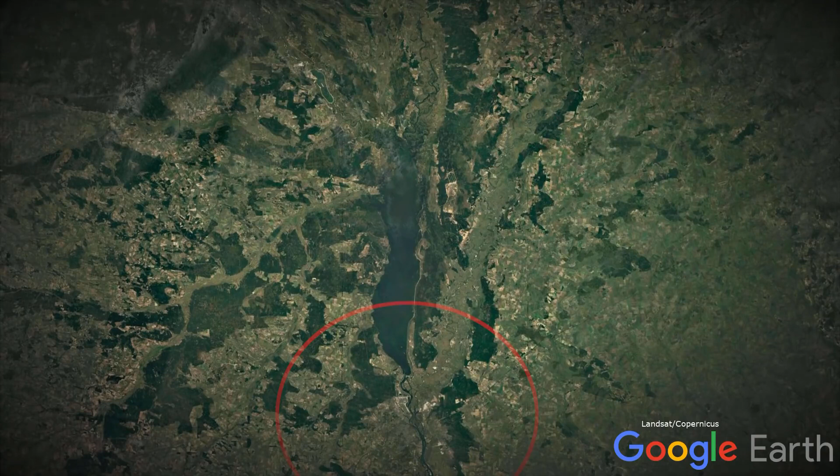Our story starts back in 1970 in Ukraine, about 100 kilometres, 62 miles, from Kiev, when ground was broken for a new city that would become known as Pripyat, an Atomgrad that was designed to house the workers for a new nuclear plant. It should be said that the original plans were to build the city and the plant just 25 kilometres or 16 miles from Kiev, but it was thought to be too close to a major city, which turned out to be a good decision.

The concept of an Atomgrad is similar to, say, Tomsk, which were closed cities, although Pripyat was open later on in its short lifetime as a city. These municipalities were designed to be self-contained communities that had a sole purpose, and that was keeping the power plant working and, by extension, the workers that were employed there happy. The community at Pripyat was developed to be the perfect home for a young family, with its amusement park and modern, at the time, architecture.

In the same year, the ground where the new plant would exist was prepared for construction. The Chernobyl nuclear power plant began construction proper in 1972 after the central government decided on what type of reactors the site would house. Originally, a pressurised water reactor was thought to suit the new plant, but it was overruled by Anatoly Alexandrov, the chief scientist who was at the time supervisor of the project of RBMK reactor plants. The reactor type was preferred due to the design being cheaper to produce, and as we found out with Leningrad, that cost was a pretty high priority, some might say even over safety.

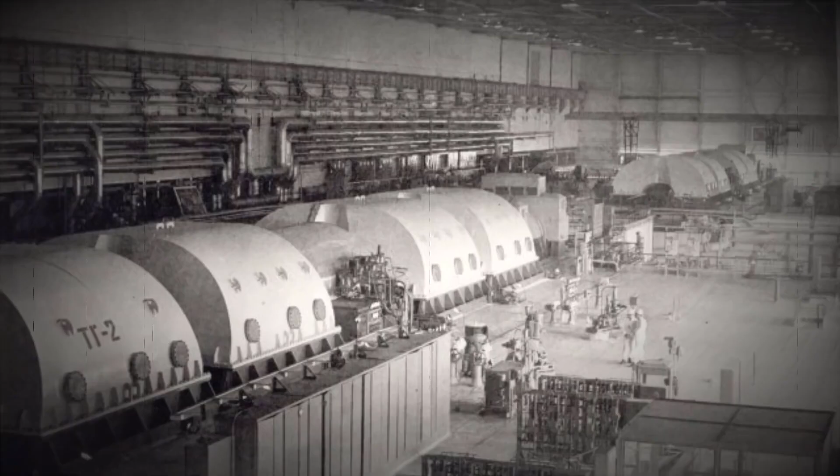The nuclear power plant had the first of its 4 reactors ready to operate in 1977, followed by number 2 in 1978. As a quick side note, Units 1 and 2 were the first generation RBMK 1000 reactors, and because of this they had slightly different core loadings and containment structures. But the remaining 2 reactors at Chernobyl were of a slightly more modern second generation, named Units 3 and 4, which went online in 1981 and 1983 respectively. There were plans for another 2 units, but these were abandoned after 1988 when risks of contamination left the project untenable.

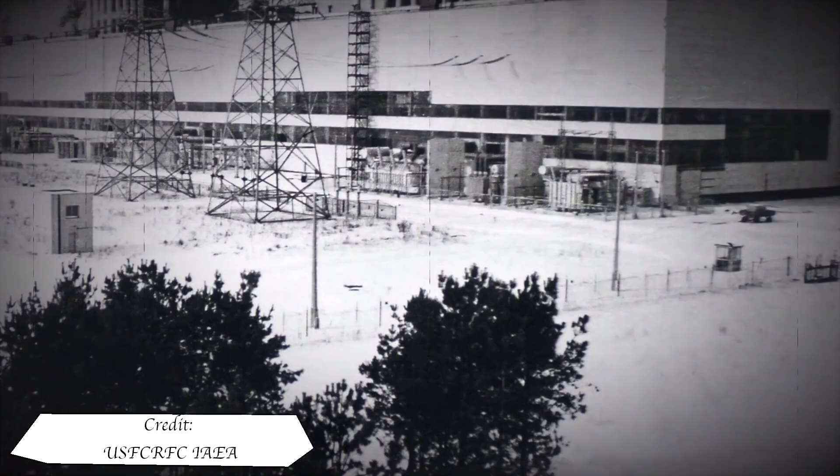The nameplate capacity of Chernobyl nuclear power plant was Unit 1 at 1000 megawatts of electricity, Unit 2 at 1000 megawatts of electricity, Unit 3 also had 1000 megawatts of electricity, and the same with Unit 4. In this video, I'll be focusing on the second generation RBMK, its design, and more specifically Unit 4. But I did look into the first generation in the Leningrad video.

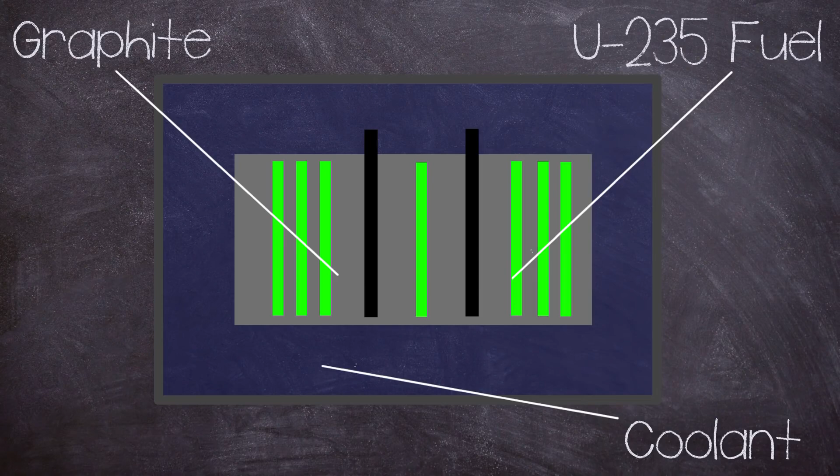The RBMK was a bit of a unique design in the reactor world, but it was a product of evolution rather than revolution, in that it used graphite to moderate the chain reaction with light water as a coolant. This combination allowed it to use lower enrichment uranium-235 for fuel, which is not surprisingly significantly cheaper than other reactor designs. The RBMK had a very large core region with a height of 7 metres and a diameter of 11.8 metres, which was mounted in a steel cylinder placed on top of a biological shield.

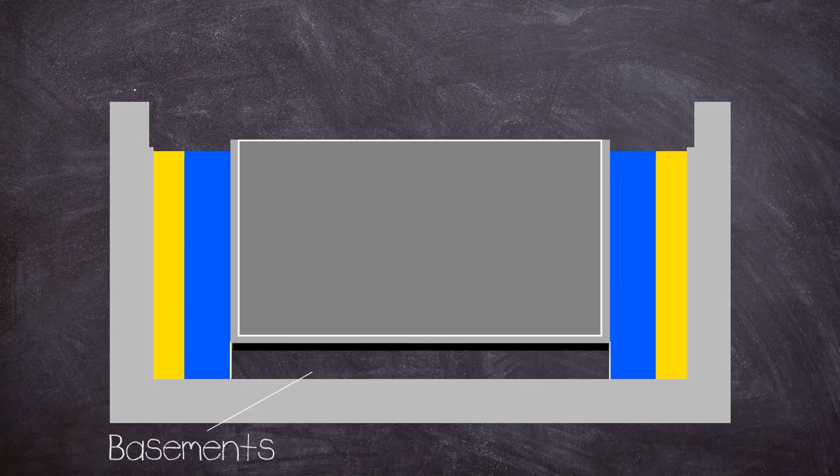The steel cylinder was 16mm thick and had a diameter of 14.52 metres by a height of 9.75 metres, dug into the floor of the reactor building, inside a reinforced concrete lined pit. Between the steel wall and the concrete lining, a water tank was placed, followed by a sand packing. Below the bottom biological shield, there were several basements used for pipework for the reactor core cooling loops. The core consisted of graphite blocks sized 25 by 25 centimetres, stacked up with holes drilled through the centre for fuel and control channels.

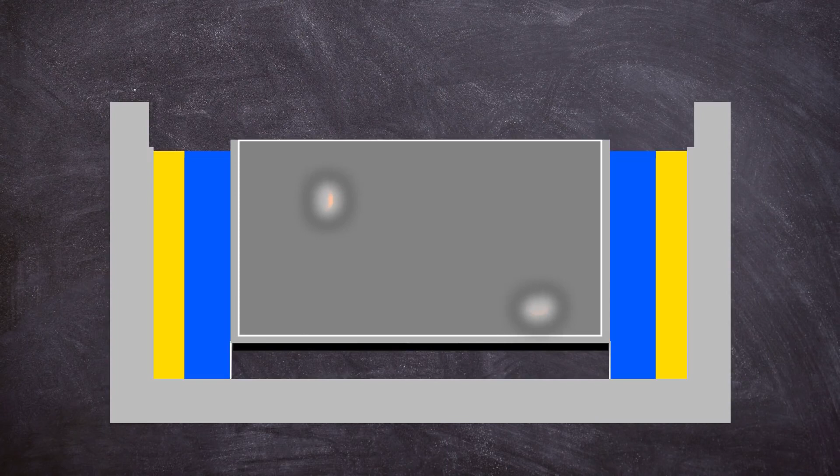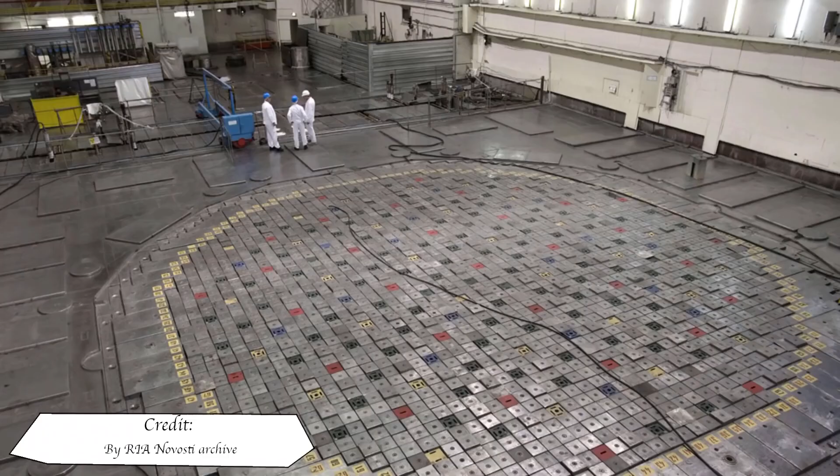The size of the core could cause issues in reactivity control during operation, but we will talk about that a bit later on. On top of the core, another biological shield was placed with a steel cover on top of it, which formed the floor of the reactor hall. The cover plate was capable of withstanding a pressure build-up resulting from steam released by two simultaneous channel ruptures. All of this allowed the design to be refueled whilst in operation, which again helped with costs by reducing downtime.

As a side effect of this, the confinement structure of RBMK reactors is less than ideal, as the tall refueling machine had to be housed inside the reactor hall. Because of the large floor space and subsequent roof requirements, the vast quantities of heavy concrete wouldn't have been architecturally, or more importantly, financially viable.

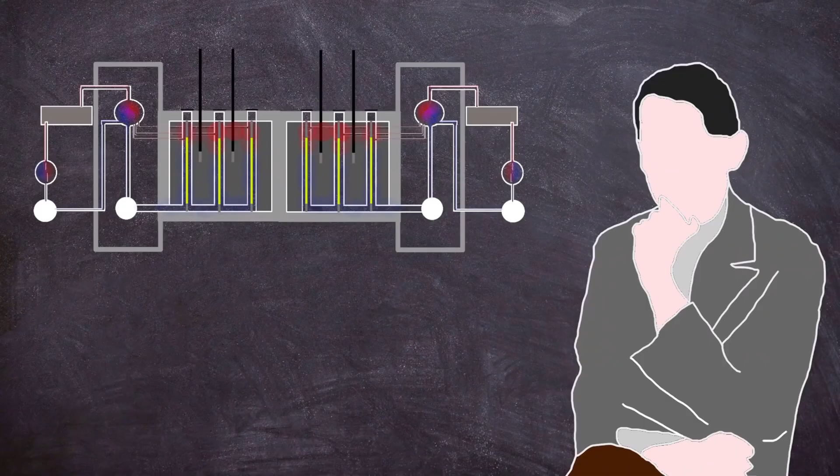The RBMK didn't have a prototype and was instead put straight into production, with the first reactor being installed in Leningrad in 1970. The original designs omitted containment, instead claiming that the fuel being in its own channel with flowing cooling water was an acceptable alternative. The main takeaway from this is containment was poor, resulting in disastrous results in the case of fission product release.

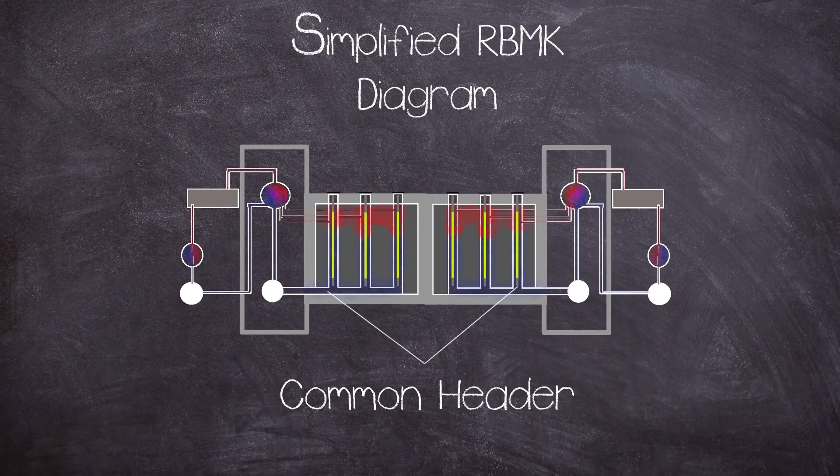The coolant was pumped through the core, from the bottom common header through high pressure tubes that jacketed the fuel elements, where the water would boil. Coolant water also circulated in the control rod channels. The primary cooling of the reactor was via two separate cooling circuits, one for each half of the core, meaning everything was doubled up, leading to four main circulating pumps, which were three operating and one standby per loop.

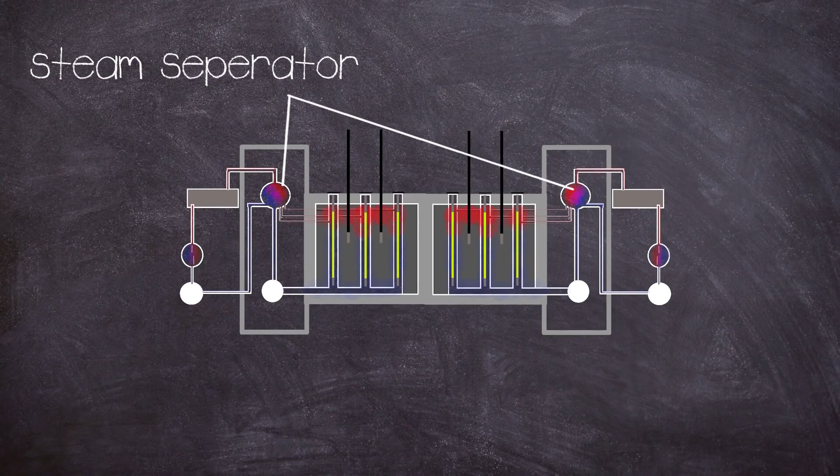As the coolant boils, it exits the top of the core and is passed through a water steam separator, which takes the steam to high then low pressure turbines which generate the electricity. The steam is then passed through a condenser that turns it back into water to be pumped back into the core, completing the primary cooling circuit. The condenser is cooled by using a separate secondary water cooling circuit, meaning the primary cooling circuit is self-contained.

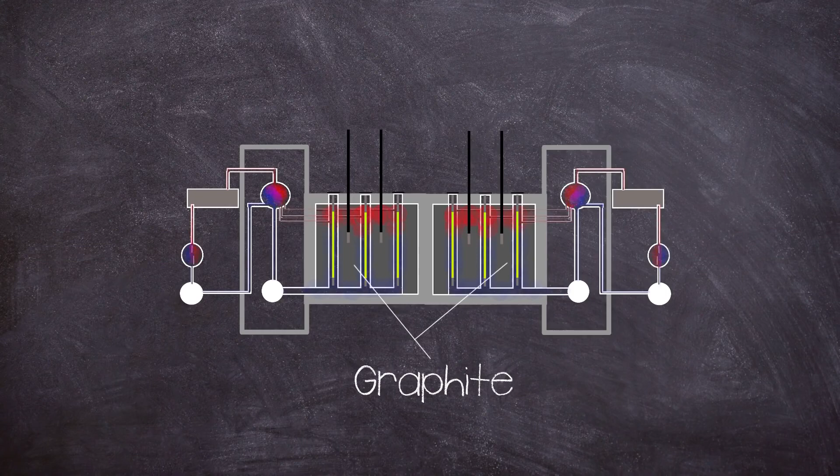As mentioned before, the reactor employed graphite blocks for its moderator. Now, a moderator is used to reduce the speed of fast neutrons released from fission, so they can better facilitate a chain reaction, getting more use out of the fuel. Ideally, moderators work without capturing any neutrons, leaving them as thermal neutrons. But where the design has its potential flaw is having a separate coolant that can also absorb neutrons, which can make the reactor unstable in certain situations.

This brings up the big elephant in the room, and that is void coefficient. You see, it wasn't just the graphite that had moderation characteristics, but the coolant water as well, because H2O naturally slows down and absorbs neutrons. This brings a problem for the reactor, as with the increase in temperature from fission, the coolant boils off into steam, known as voids, i.e. a bubble that does not absorb neutrons. With the steam not absorbing neutrons, this leads to an increase in the power of the reactor.

The RBMK did not rely solely on its coolant for moderation, because that's what the graphite was for, but the water did absorb neutrons, meaning that as it boiled off, the operators had to compensate for this with the control system. If not properly managed, a runaway can happen as the coolant heats up, increasing reactivity, heating up the coolant more, creating more steam, leading to greater reactivity, and this is called a feedback loop. During this reactor state, more and more neutrons are produced and their density grows exponentially fast, creating a positive void coefficient. The risks of a feedback loop were greater at certain power levels, but this will be covered later on.

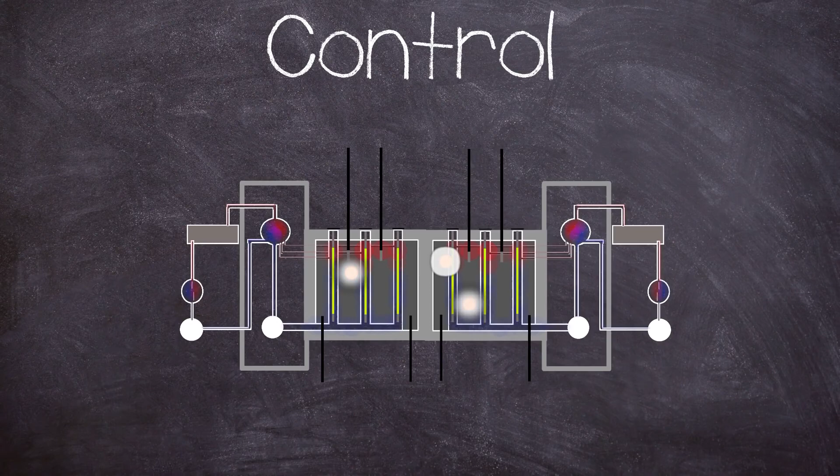Now this leads us quite neatly onto reactor control. As I said before, the core region was rather big, and this meant that the RBMK was kind of like multiple smaller reactors in that hotspots could occur which needed to be individually managed. And this leads on to the strange design choice for both top-loaded and bottom-loaded control rods.

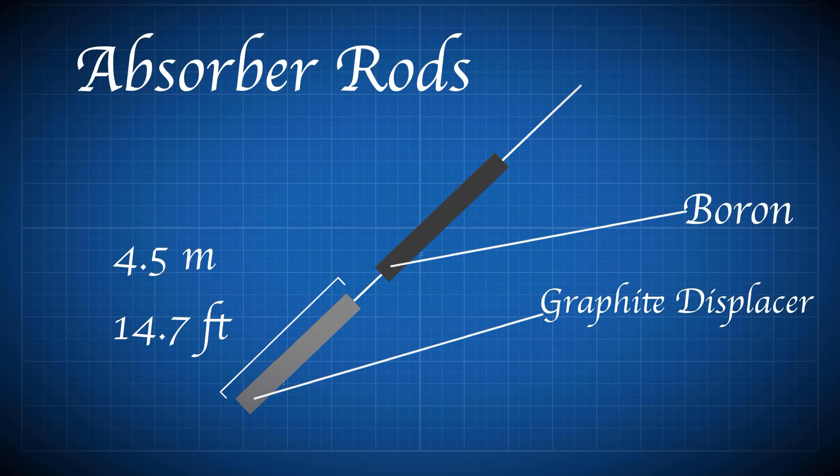There were 167 top-loaded rods and 32 shortened rods loaded via the bottom, and another 12 automatic controls inserted from the top. The shortened rods were used to manage axial power distribution, which was necessary due to the core size to manage hotspots. The main control rods had a 4.5 metre long graphite rod termed a displacer attached to the end of the length of the control rods, except for the 12 rods that were used in automatic control.

The displacer connected to its rod via a telescope, with a water-filled space of 1.25 metres separating the displacer and absorbing rod. This was to stop water filling the space left behind by the control rod after it has left the core region, which would parasitically absorb neutrons. Because removing one neutron absorber in the form of a boron control rod to be replaced by another neutron absorber, albeit weaker, in the form of H2O, kind of defeats the point of a control rod.

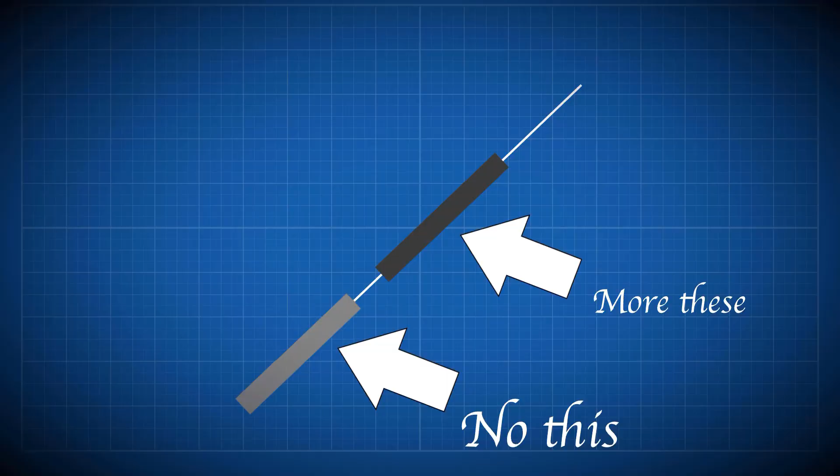Thus, if there was no displacer, then more control rods would be needed, as each one would have less of an effect on the reactivity of the core. The dimensions of the rod and displacer were that, when the control rod was fully extracted, the displacer sat centrally within the fueled region of the core, with 1.25 metres of water at either end. But this setup in certain situations could cause a positive scram effect.

On receipt of a scram signal causing a fully withdrawn rod to fall, water was displaced from the lower part of the channel as the rod moved downwards. This caused a localised insertion of positive reactivity in the lower part of the core. This was because the RBMK had a high moderator to fuel ratio, meaning the lower part of the core would experience a spike in reactivity as the graphite displacer entered it, as it replaced the neutron absorbing water with a neutron moderating graphite.

But this situation was only dangerous at certain power levels of the reactor, which was meant to be mitigated by the knowledge and training of the operators, and also importantly by their management. Part of this mitigation was by having an operating reactivity margin. The ORM is the number of equivalent control rods of nominal worth remaining in the core.

The total time required for a scram or insertion of the emergency control rods into the core when starting from the upper limit stop switches was around 18 seconds, which was relatively slow, but this was due to the size of the control rod channels and the fact that the coolant had to be pushed out of the way. The scram could be initiated by the control system or manually via the AZ5 button.

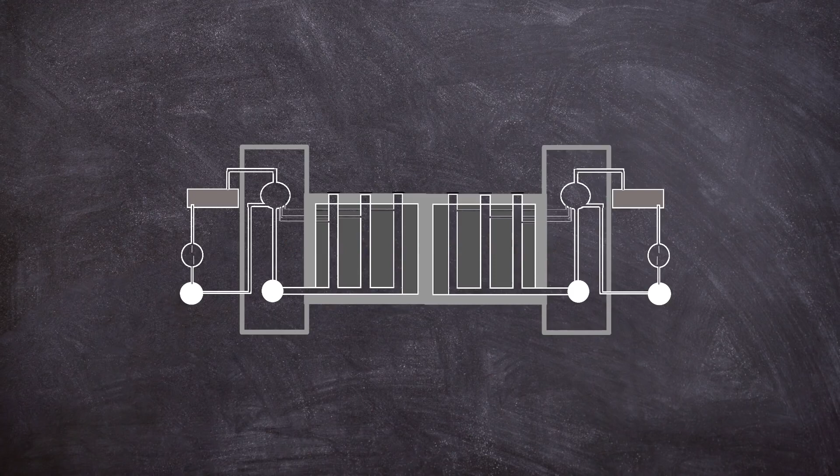This meant that low power operation below 10% had to be done by the operators relying on experience and feel rather than monitoring the equipment. But manual low power control was only really intended for a cold startup, so to speak, when the reactor was free of the neutron absorbing poison Xenon-135. Right, I need to mention neutron poison, as it will play a vital part later on, and was also a contributory factor in another RBMK incident, the meltdown in Leningrad in 1975.

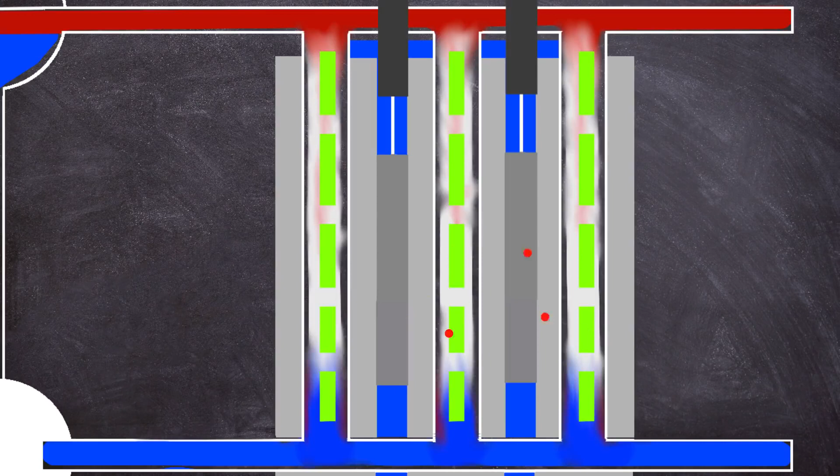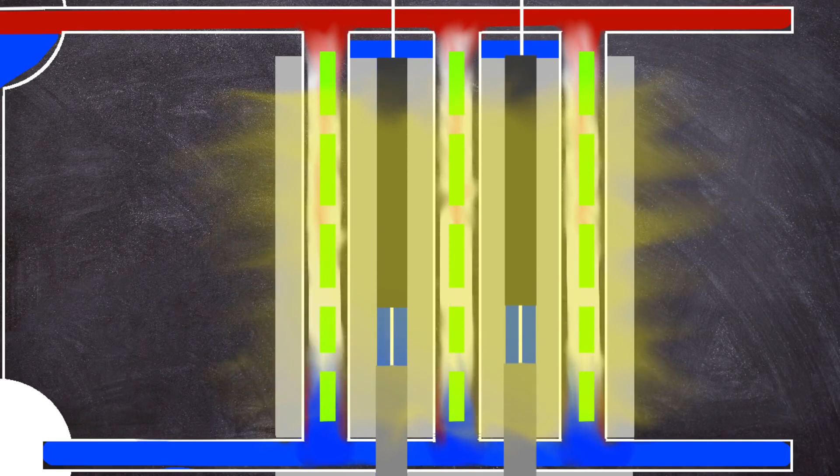During fission, some products are given off, one of which is Xenon-135, which has a high neutron absorption rate, which is okay when the reactor is in a steady state, as it burns off this undesired byproduct, as poison burning is proportional to reactor power. But when the power of the reactor is decreased, the Xenon-135 is not burned off, and can shut down the chain reaction by absorbing too many neutrons. This is known as an iodine pit.

All is not lost, as Xenon-135 has a relatively short half-life of around 9.2 hours, so a reactor core is considered poison-free after several half-lives have passed. But this is not good from an economic standpoint, as the unit would be shut down for a few days, which is where good management is meant to come into effect, where safety is prioritised over money, but in the former USSR, taking a reactor out of action for a few days could have a detrimental effect on one's career longevity.

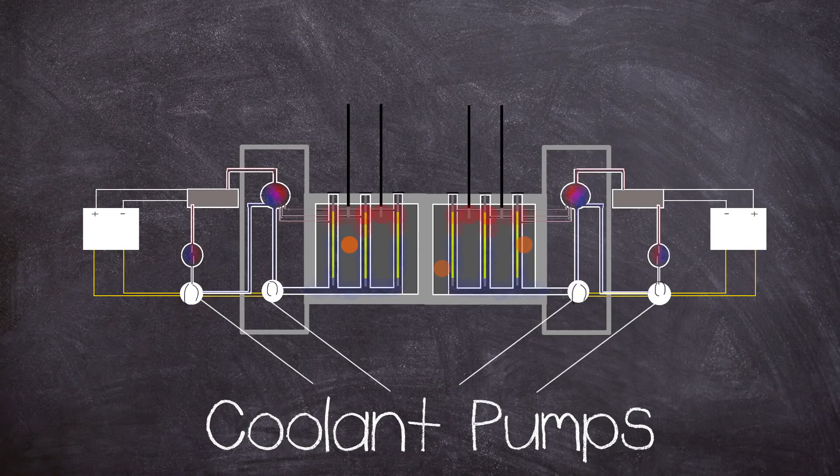Our story starts with an issue inherent to all reactors of any type, a thing called decay heat. You see, reactors produce heat from fission, which is used to create steam to drive the turbines for electrical power. Some of this power is taken to drive the electrically operated coolant pumps, which keep the coolant flowing through the core. The reactor needs around 28,000 cubic metres per hour during full power operation. Some heat is produced not directly from fission, but instead from the products produced from the chain reaction, and this is known as decay heat.

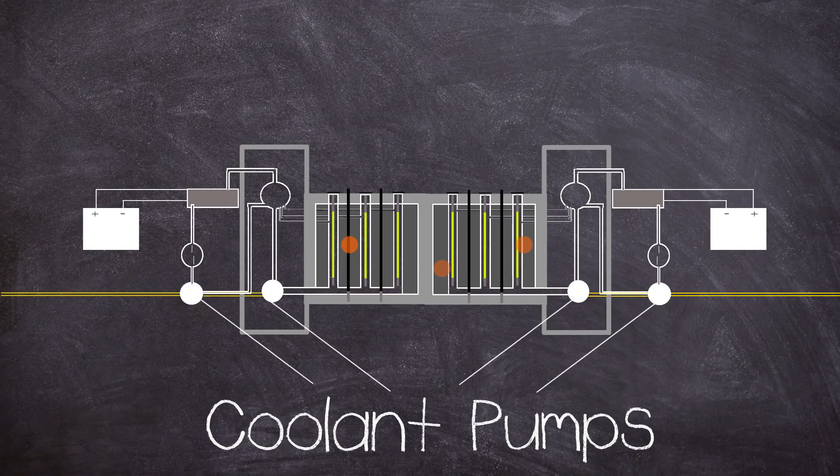And when the reaction stops, this continues, at least for a while after shutdown. During power operation, this is fine as electricity is being produced, but after shutdown, the pumps need to keep circulating to remove the decay heat. Usually the electricity needed for the pumps can be drawn from the national grid. But what about if there is a full power outage? Then backup is needed. This presents a problem.

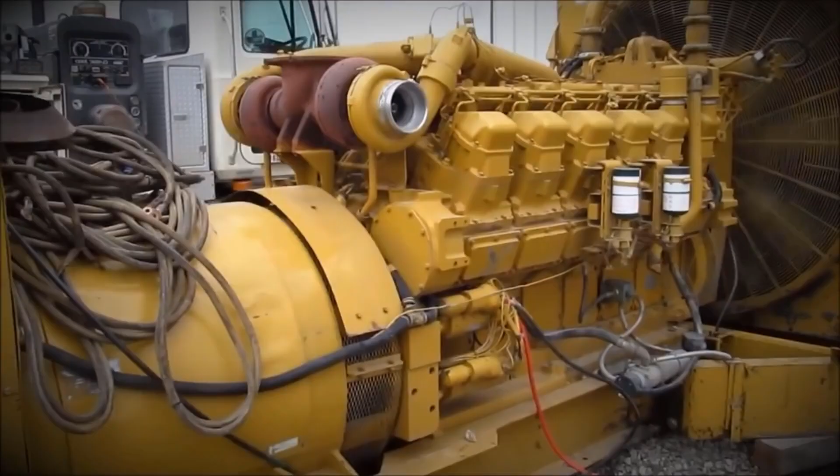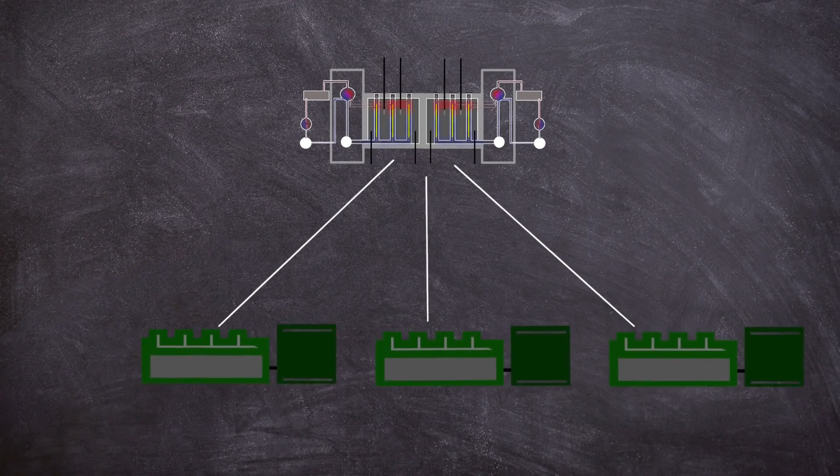If for any reason, being scheduled or not, a reactor is shut down and there is a power cut, how will the pumps keep working? Well, the solution is pretty simple, and that is a diesel backup generator. Each of Chernobyl's reactors had 3 backup diesel generators, which took in excess of 70 seconds to reach full power. Too much time in the event of a full power cut.

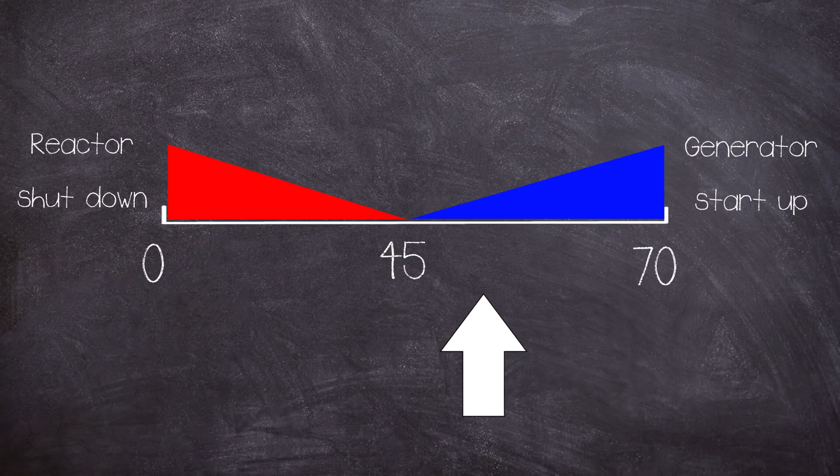In theory, some of this time could be covered by the spool down of the turbo generators, which was theorised to cover around 45 seconds. Not the full time needed, but possibly enough to prevent fuel melting. To prove that this could work, it had to be tested out, and in 1982, 1984 and 1985 this was attempted, but all tests failed to produce the electricity needed to run the pumps. The test was to be conducted again in April 1986.

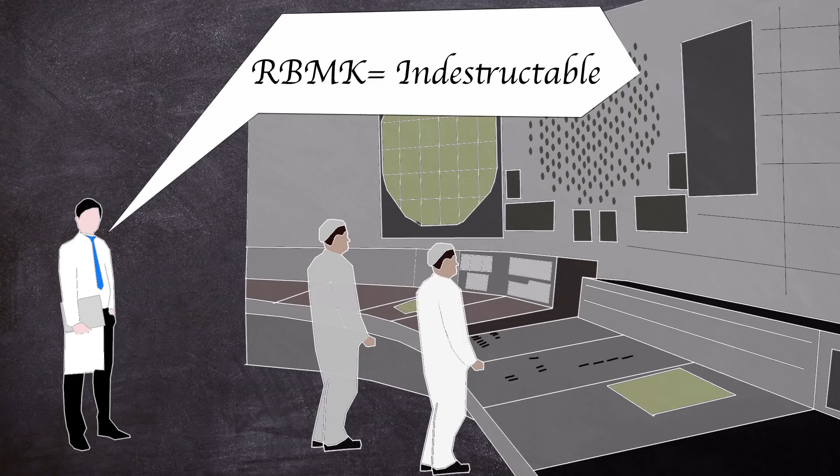Strangely, the test procedure that was written hadn't taken into account the eccentricities of the RBMK reactor, especially at low power outputs. The test was to be conducted during a routine shutdown. For the test to go ahead, some vital systems had to be switched off, most notably the active-passive emergency cooling system used in a loss of cooling accident. This required the chief engineer to sign it off.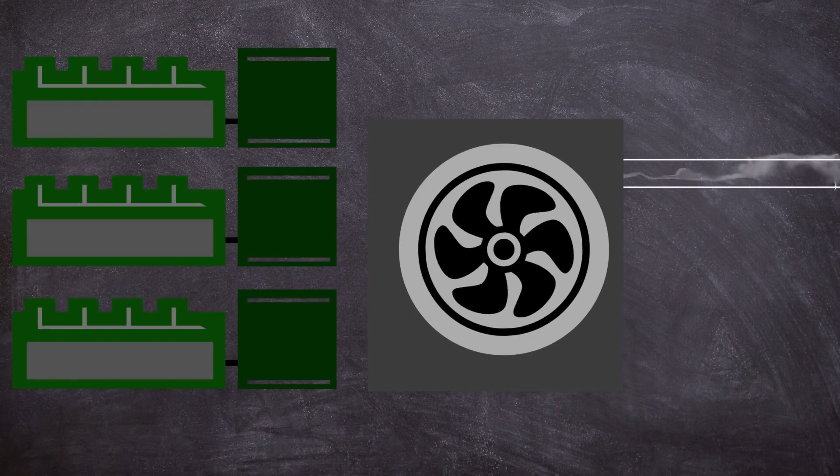In preparation for the test, the following had to be set up. The reactor power was to be reduced to between 700 and 1000 megawatts of thermal energy, and the steam turbine generator was to be at normal operating speed. After all this was sorted, the preparations for the electrical test could go ahead. The steam supply to the turbine generator would be closed off. The turbine generator performance would then be monitored to see if it could bridge the power for coolant pumps until the emergency diesel generators took over.

When the emergency generators supply electrical power, the turbine generator will be allowed to continue freewheeling down. The normal planned shutdown procedure of the reactor was then to be completed. The date of the test was to be the 25th of April 1986, 2:15 p.m., completed by the day shift. As such, the operators were briefed on the procedure and a team of electrical engineers was present.

At around 1 a.m. on the 25th of April, the reactor was gradually powered down to around 50% in time for the day shift. At 1:05 p.m., the turbo generator TG7 was switched off. The 4 main circulating pumps, 2 electrical feed water pumps and other electrical equipment that was connected with this turbo generator were switched over to bus bars for the turbo generator TG8.

The ECCS was disabled with the correct authorization from the chief engineer, but just after 2 p.m., the Kiev electrical controller asked for the test to be postponed to cover the evening electrical peak demand. The request was due to another power station in the region unexpectedly going offline. Chernobyl's director agreed and the test was pushed back, but the ECCS was not reinstated. The status of the ECCS showed the lack of safety culture at the plant. Although the system wouldn't really be a factor in a disaster, it highlights the management culture at the time.

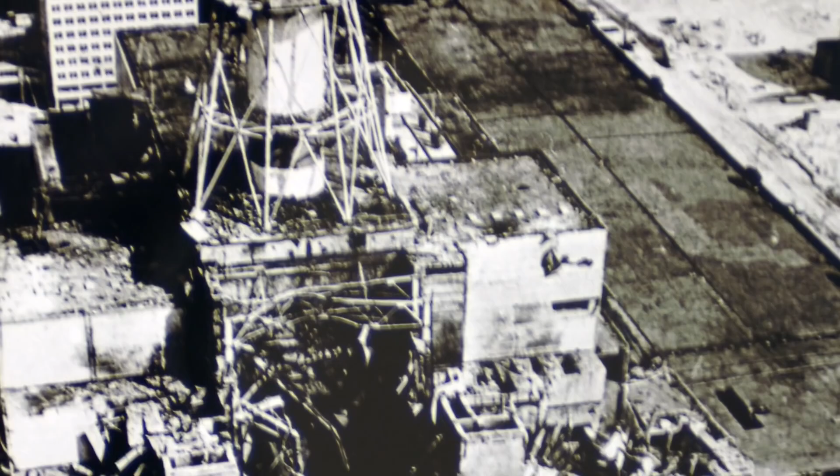Some of the debris that was ejected started a fire on the roof of Reactor 3's building, but insanely the unit wasn't shut down straight away. Instead, the operators were told to take iodine tablets and don respirators. At 1:45 in the morning, the first responders from the Chernobyl fire team arrived under the command of Lieutenant Vladimir Pravik and began trying to extinguish the flames on Unit 3's roof. All around them lay pieces of Unit 4's graphite core. The firefighters were only aware of the fire, and because of this they didn't have any radiological protective clothing on. As they worked, they breathed in some of the fission material in the form of dust and were exposed to the deadly radiation.

Many would come down with acute radiation sickness shortly after. Some of the first responders felt a metallic taste in their mouths, similar to what others had reported post-exposure, for example from the victim of the Wood River Junction criticality.

The fires on the roofs of Units 3 and 4 were under control between 2:10 and 2:20 in the morning, and the fire was fully put out at 5 o'clock in the morning. However, the graphite fire in what was once Unit 4 continued to burn, expelling its radioactive plume of dust, steam and smoke into the atmosphere. The operators started to pump water into the core, but this did little to bring the situation under control.

The estimated dose of 5 to 6 Röntgens per second was experienced around some parts of the reactor building, which is equivalent to more than 20,000 Röntgens per hour, which is enough to give you a lethal dose in minutes. The effective dosimeter monitoring of the operators was unavailable when the two 1000 Röntgen per second capable meters were inoperable. The only remaining meters maxed out at 0.001 Röntgens per second, which immediately read off the scale when used, meaning that no one in the control room actually knew what they had received.

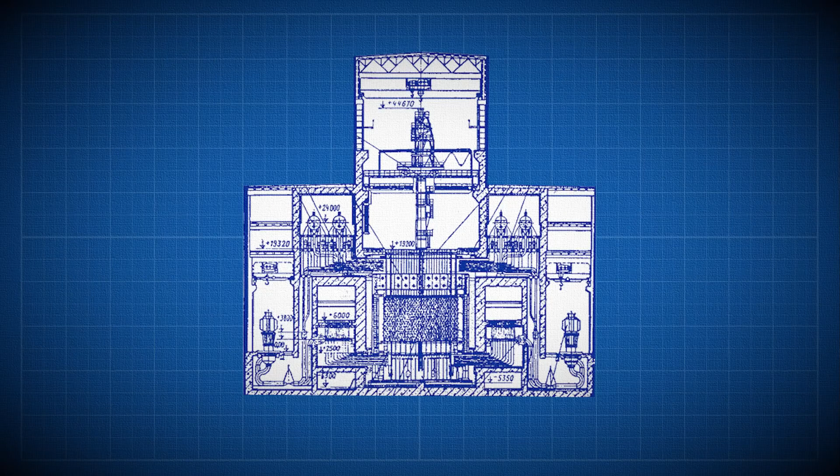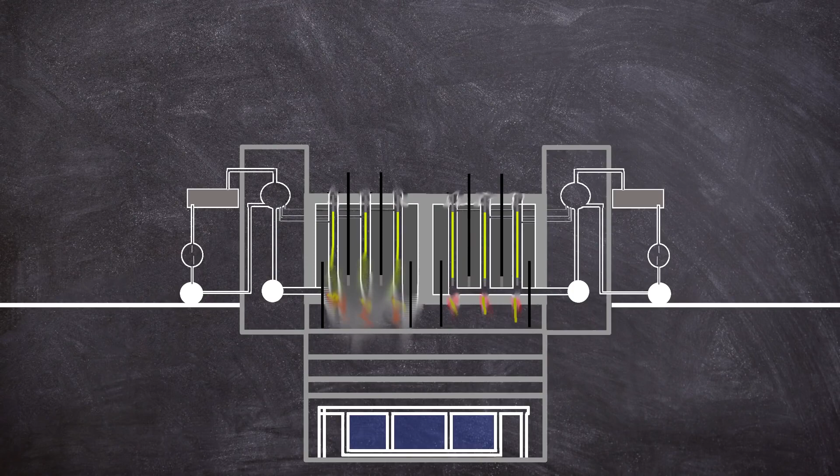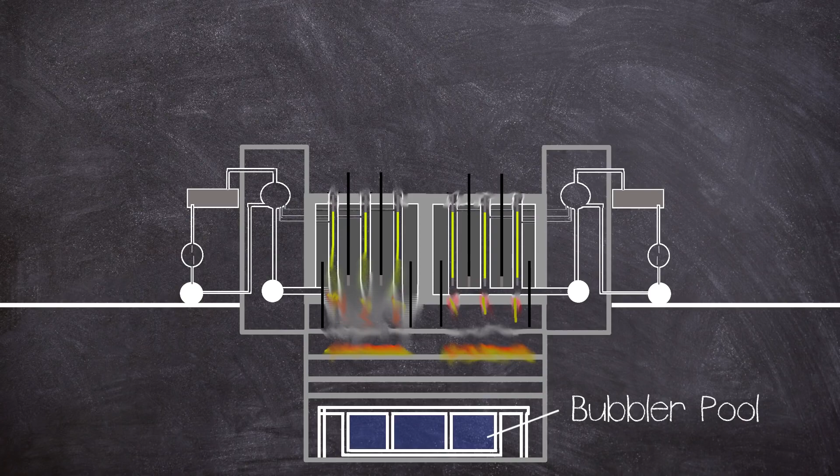Engineers Alexei Ananenko and Valery Bespalov and supervisor Boris Baranov volunteered to empty the bubbler pools. This was done by valves controlling sluice gates, which were housed in a room that had now become flooded. All three men donned protective suits and breathing equipment and made their way down the corridor. The men were successful and the bubbler pools began to empty. Surprisingly, all three survived not only the day but continued to live long after the disaster, averting the immediate steam explosion. But that wasn't the end to the worry of a deadly explosion.

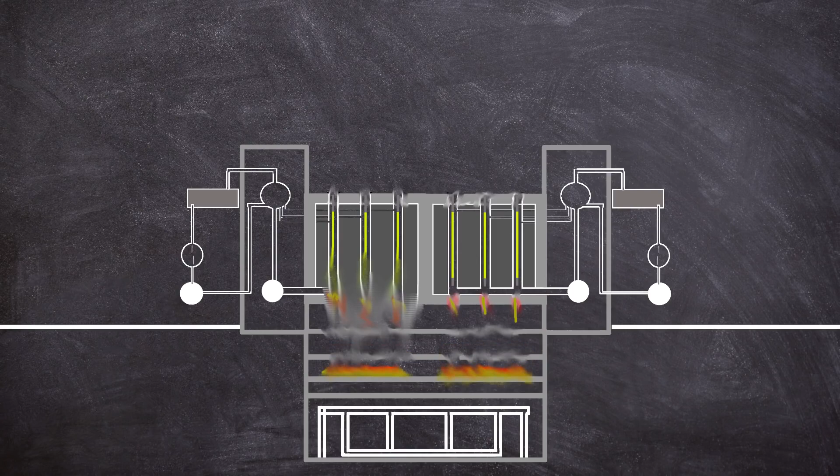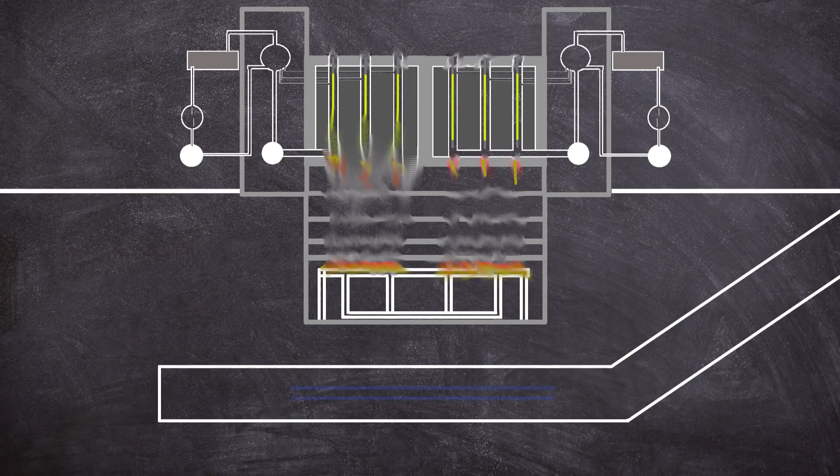As described in the film China Syndrome, the core could continue to melt through the floor of the containment and into the earth, eventually hitting the water table, meaning another steam explosion. The next focus of the accident management team was stopping the molten core from escaping the bottom of the reactor basement. A design was thought up by physicist Leonid Bolshov that involved digging out a cavity below the reactor building basement. The concept used a coiled formation of pipes cooled with water and covered on top with a thermally conductive graphite layer. The graphite cooling plate was to be encapsulated between two sacrificial concrete layers, each one a metre thick. In theory, as the molten uranium oxide hit the graphite, it was to rapidly cool down, catching the core meltdown.

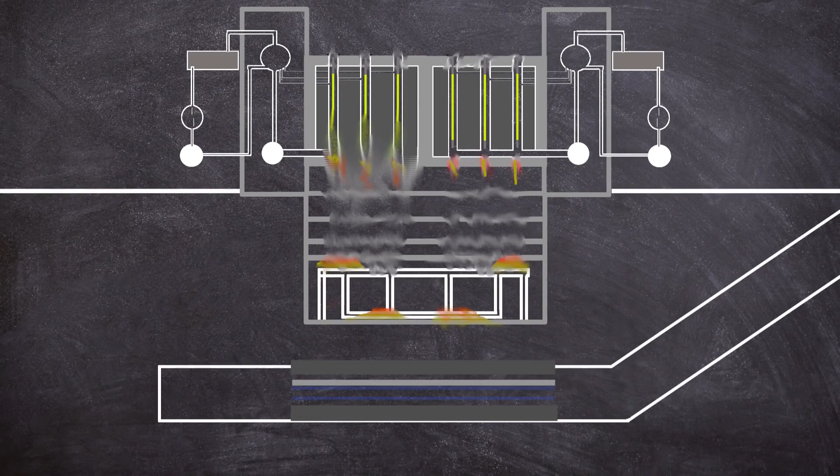Thankfully, the theory didn't have to be put into practice, as the core had finally come to rest in one of the lower basements of the reactor building, part of which formed the famous Elephant's Foot, which was discovered in December 1986, which had a radioactivity of 8,000 roentgens, or 80 grays per hour. For reference, a whole body dose of around 5 grays can be lethal. The molten material is known as corium and is a mixture of the material found inside the core, and is mainly made up of silicon dioxide with traces of uranium, graphite, zirconium and titanium. The excavated cavity and cooling system, now unneeded, was filled with concrete to help the structural integrity of the heavily damaged reactor building.

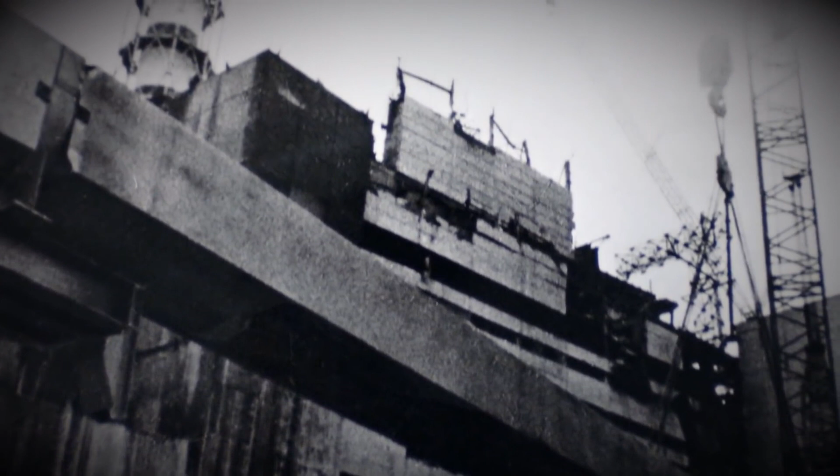A plan was conceived to contain the contamination release of Unit 4 in the form of a concrete lid, which would come to be known as the sarcophagus. Construction began in May 1986, 24 days after the disaster, to encapsulate some 200 tonnes of radioactive corium, 30 tonnes of highly contaminated dust, and 16 tonnes of uranium and plutonium. The construction would last for 206 days, between June to late November of the same year.

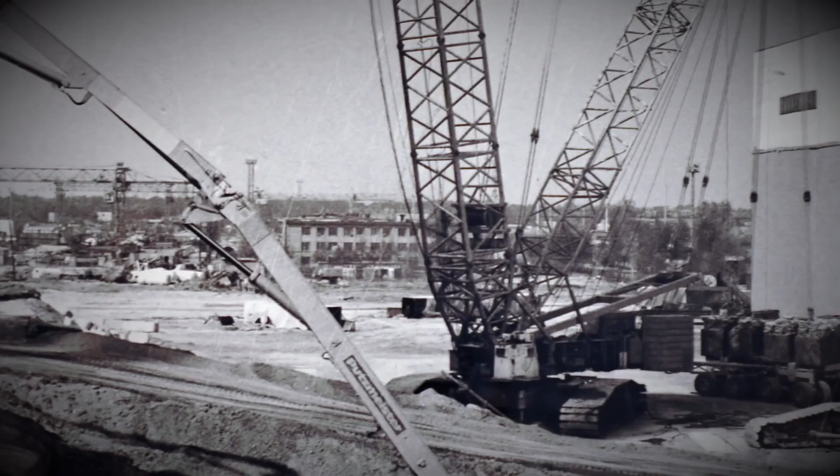But before the core could be enclosed under the sarcophagus, the next phase of remediation was to remove all the core material that scattered the area, and one of the most dangerous places was the roofs of the buildings surrounding Unit 4. Initially, robots were thought to be able to undertake the clearing works, but due to radiation interference, only around 10% of the debris could be recovered. This necessitated the use of good old-fashioned people. The most basic of equipment was needed for the task, which included protective clothing and a shovel. A total of 5,000 people, known as liquidators, were called upon to undertake the cleanup on the roof, each only being allowed between 45 to 90 seconds of total working time to reduce the risk of exposure. The calculated risk was 25 rem, or 250 millisieverts, of radiation per person. There were many more liquidators also used for other clearing up works in the wider area.

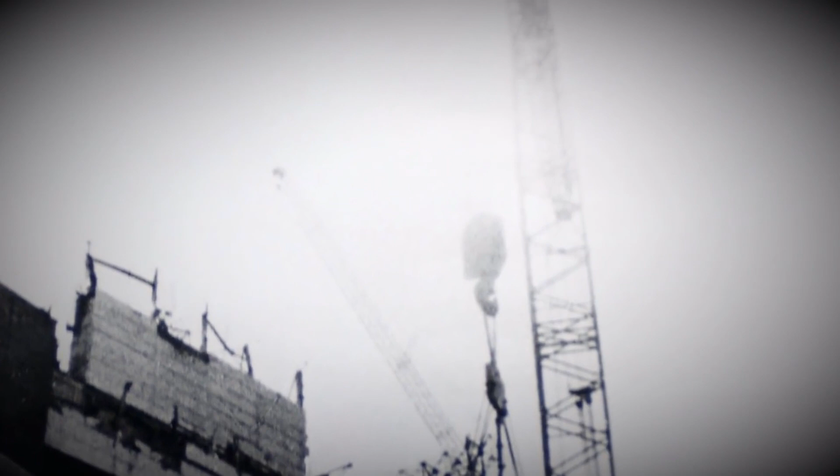And finally, after this, the sarcophagus could be closed over the turbine hall and reactor building. The construction was undertaken over 8 stages, all whilst Unit 4 released contamination, and next to Unit 3, which still needed to be operable. Concrete containment walls were built around Unit 4 and a dividing wall was erected between it and Unit 3. The sarcophagus was placed on top of the concrete containment walls. More than 400,000 cubic metres of concrete and 7,300 tonnes of metal were used during the construction of the sarcophagus. The building encapsulated an estimated 740,000 cubic metres of heavily contaminated debris together with contaminated soil.

Holes were installed in the structure to allow pressure release, albeit through a filtration system. The shelf life of the structure was only thought to be around 20 to 30 years, necessitating a new containment structure, but this will probably be covered in the next video in this series. So, with an official death toll of 31, a nuclear power plant essentially unusable, and many decades ahead of remediation works, how was Unit 4 allowed to be operated in such a dangerous state? Unsurprisingly, it comes down to management.

The warning signs of the potential for fuel damage in an RBMK 1000 reactor reared their heads several times through the reactor type's history. A partial fuel melting in Leningrad over 10 years before in 1975 had been covered up, and information was not passed on to other RBMK operational staff at different power plants. Again, the fuel melting incident that happened in 1982 at Chernobyl Unit 1, no less, was also covered up, this time by Viktor Brukhanov, meaning lessons again were not passed on.

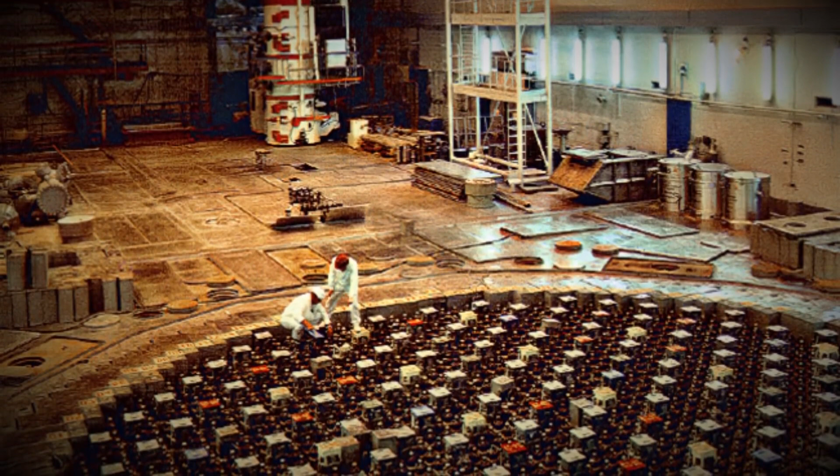The risks of a positive effect of scram causing a power spike were known in December 1983 at Ignalina Unit 1. Unlike other incidents involving RBMKs, the information from the event was passed on to other plants, but was thought to have not been important enough to act on, as the control rods didn't get stuck and did continue to stop the reaction. The IAEA was involved in the investigation into the disaster using the International Nuclear Safety Advisory Group, which had been created by the IAEA in 1985.

All of the reports have never been able to categorically say for 100% what the cause of the core uncovering was, and there is much speculation as to whether the power excursion happened pre or post scram. But operating the reactor in the state it was in meant that something was going to fail. Regardless of the inherent flawed designs of the RBMK, it was operated way out of the agreed parameters even set by the lax Soviet nuclear industry. It can be attributed to the culture of working where failure was not accepted and vital operating incidents were not learned from. As well as this, the design flaws were outright covered up and held back from the operators.

In 1987, a criminal trial was brought against 5 plant employees between the 7th and 30th of July in a temporary courtroom set up in the House of Culture in the city of Chernobyl, Ukraine. They were Deputy Chief Engineer Anatoly Dyatlov, Chernobyl Plant Director Viktor Brukhanov, the former Chief Engineer Nikolai M. Fomin, the Shift Director of Reactor 4 Boris Rogozhkin, and Chief of Reactor 4 Alexander Kovalenko. 3 other men, Alexander Akimov, Leonid Toptunov and Valery Perevozchenko, would have been tried as well, but the cases were dropped after their deaths due to radiation exposure.

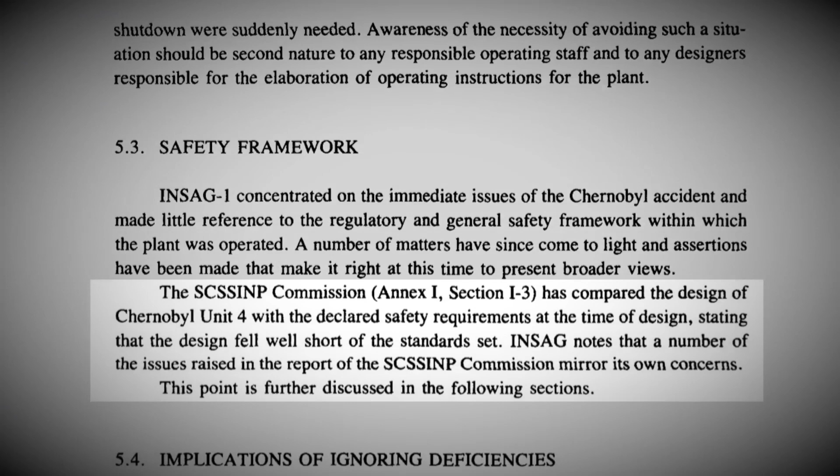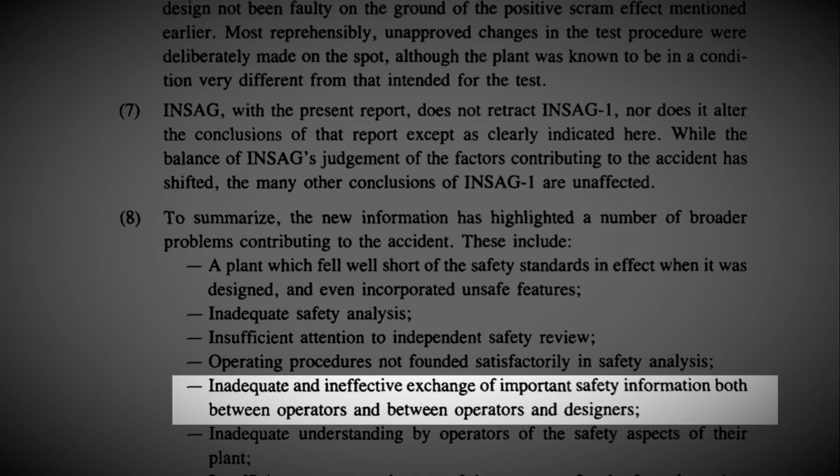This was all highlighted in the 1992 INSAG-7 report, which also said in its summary, the plant fell well short of the safety standards in effect when it was designed, and even incorporated unsafe features, compounded by inadequate and ineffective exchange of information between both operators and between operators and designers. There was an inadequate understanding by operators of the safety aspects of their plant, also affected by insufficient respect on the part of the operators for the formal requirements of operational and test procedures. The industry in the USSR had an insufficiently effective regulatory regime in place to counter pressures for production.

The pressures from central government and lack of awareness of the design risks of the reactor meant that management acted dangerously in the false pretense that the RBMK was indestructible. Pretty much the entire management structure was throwing around a grenade that they didn't know had the pin pulled out of, meaning disaster was only a matter of time.

Now I'll be following up this video with another video at some point about the wider impact of the disaster on local and wider population, as well as digging deeper into the liquidators and their heroic work. Thanks for watching, I hope you enjoyed the video.